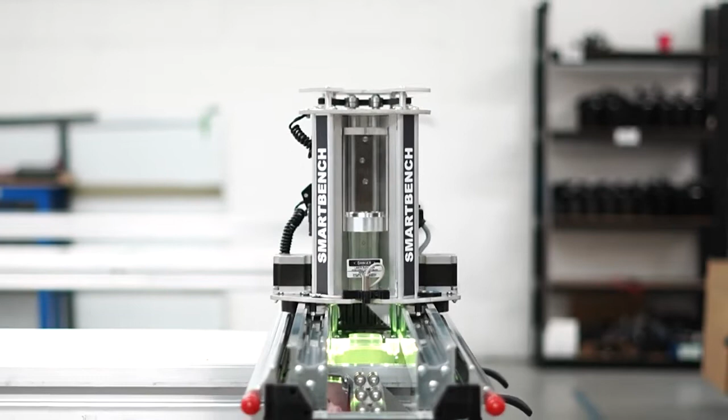Let me show you around.

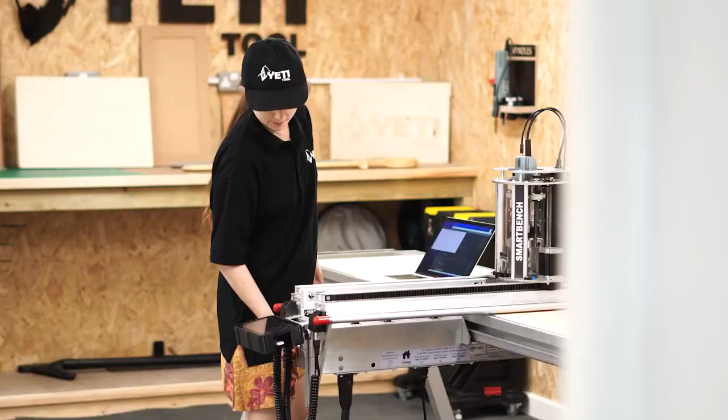We put everything into a large unit in Portishead near Bristol, where we can focus together, from design to software and mechanical development, all the way through to our production line, which can make up to 35 machines a week.

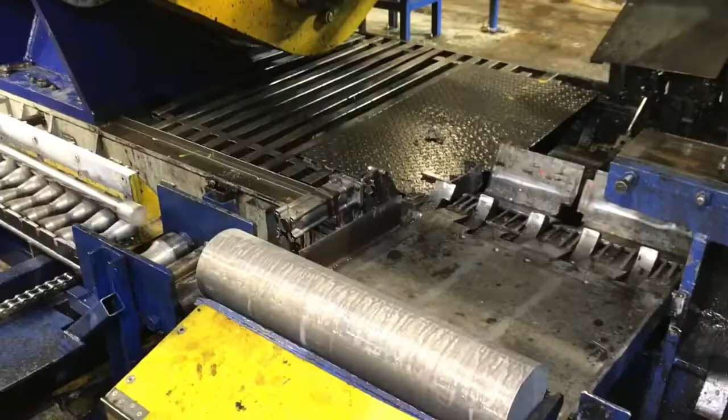87% of all parts that come in to make SmartBench are sourced from local suppliers, which we are really proud of. For example, we design all of our own extrusions for SmartBench, which are pressed up in Corby, processed using sustainably sourced aluminium from the UK, and then delivered in pallets down the M5.

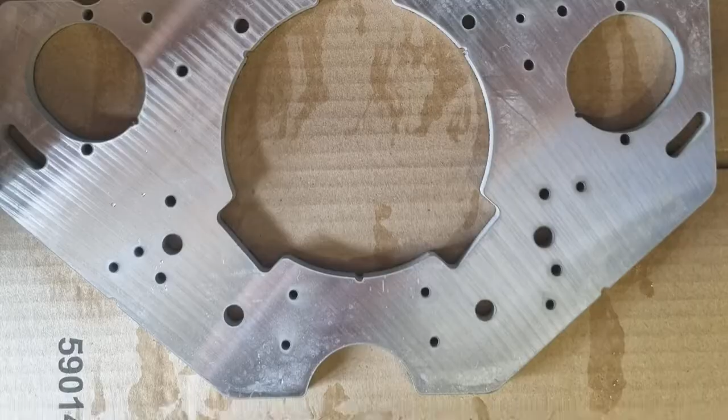And our alloy plates, again specified by our engineers, are waterjet cut down in Plymouth and then modified in-house to meet precision specifications. Other parts, like the racks in the X and Y axes, are actually manufactured right here using our own SmartBenches.

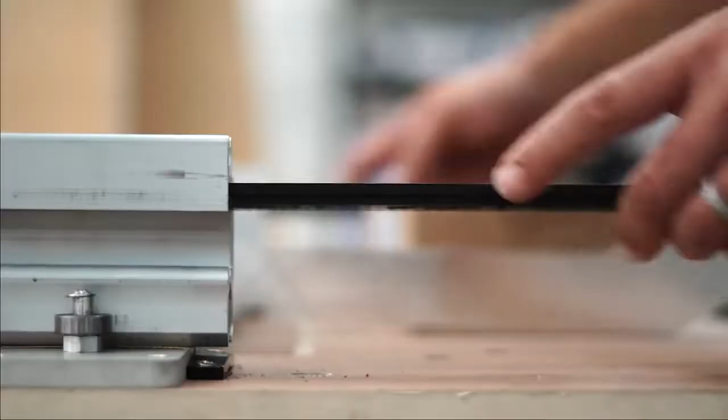I mean, that's what CNC machines are good for after all, and we're not short of that technology. They power through 12-hour shifts and are placed in an environmentally controlled chamber, which we need for this particular material.

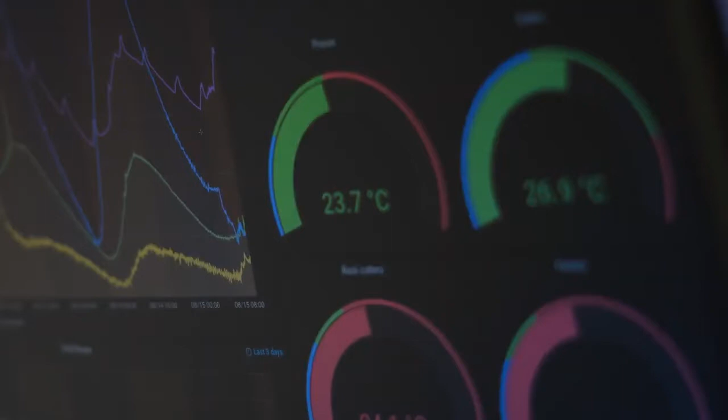When the stock comes in, it's worth £150, and when it leaves, it's worth £2,500.

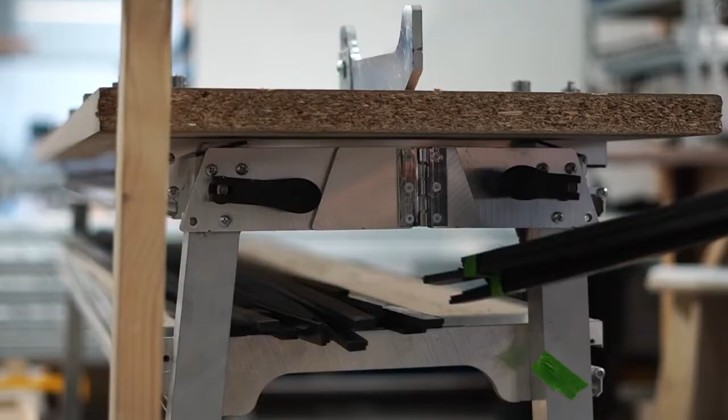Once all these parts have passed their own quality checks, they're distributed to the sub-assembly stations where operators are ready to build.

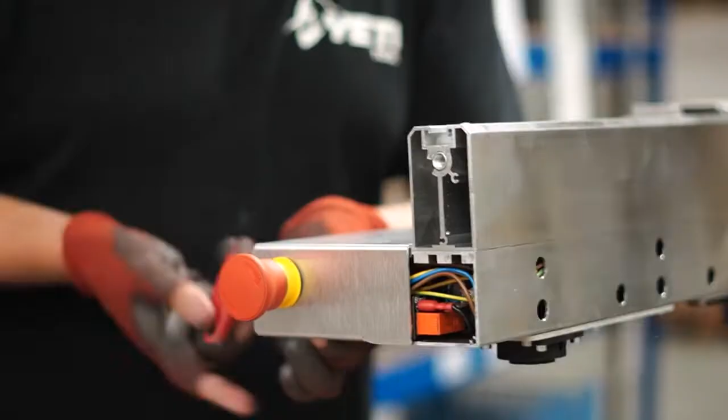SmartBench is made up of 6 different sub-assemblies, and we have an assembly station for each one. As each sub is built, it has its own unique test to check it's performing as expected.

For example, the Z-head, which takes the most time to build. From scratch, this would typically take about half a day to make.

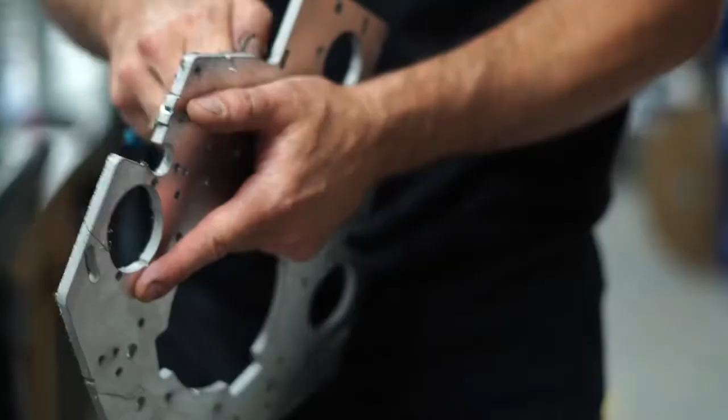When the mechanics have been built, it's connected to a jig which runs the axis up and down to measure the force needed.

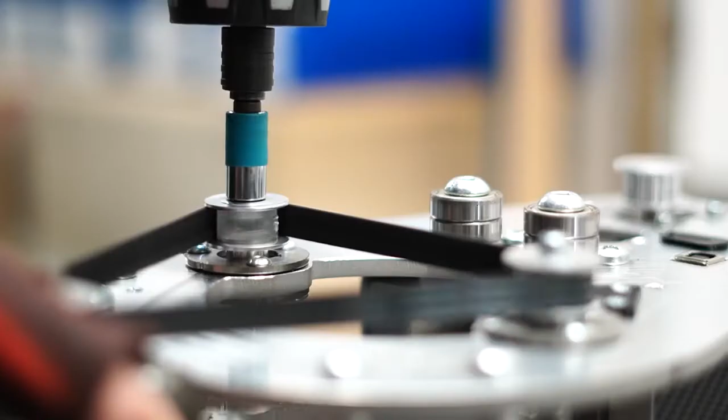We get all of the graphs in real time so that the operator can analyse the rolling resistance.

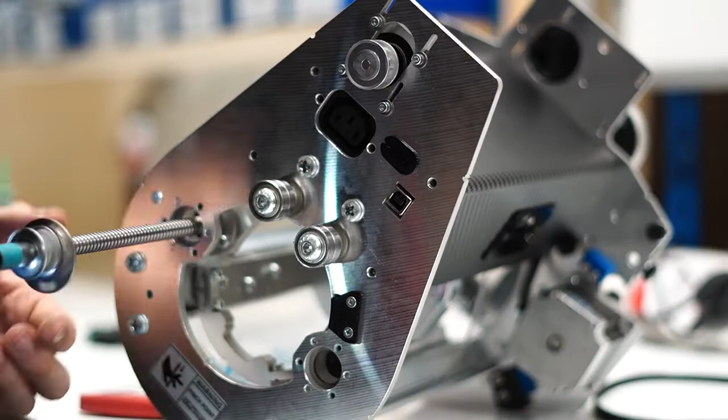Once the mechanics have passed, it gets its own set of electronics, which then does a self-test, finished with a calibration soak procedure, which takes about an hour.

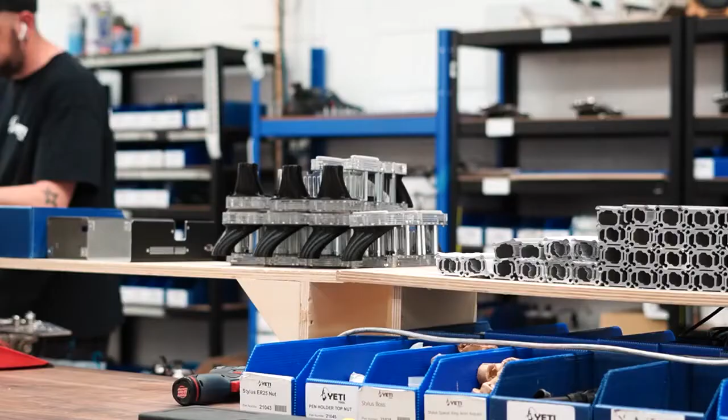We apply this level of testing to all the sub-assemblies that have electronics, so that when the finished sub-assembly gets put on the shelf, it's perfectly ready for final test, where we're able to bring the whole machine together.

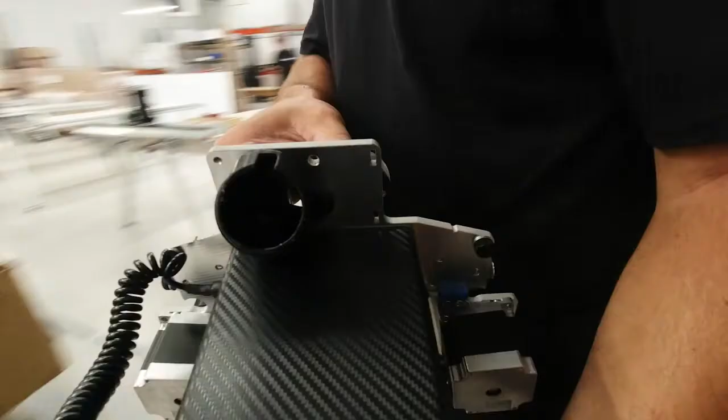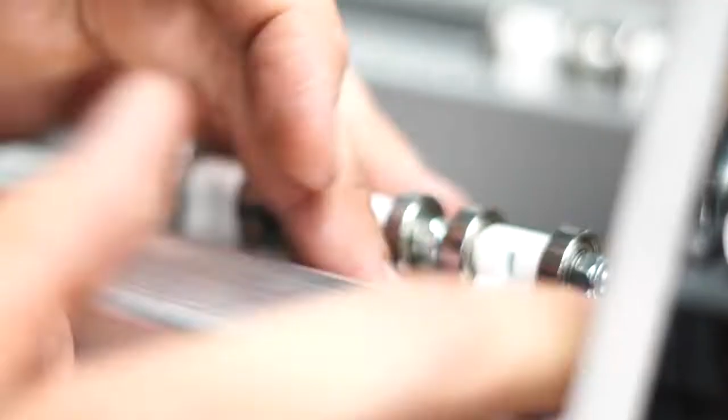We build up the machine just as you'd assemble your own SmartBench. After it's been checked and squared, it's given a serial number and sent on an automated 6-hour endurance test to run in the machine.

And at the same time it records its own performance. All the while it's measuring 1 million data points, which all get sent up to a server for central analysis.

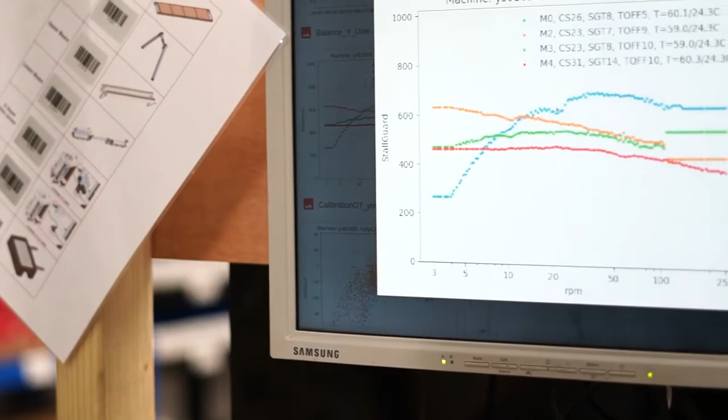Once the bench has passed all of our data checks, it gets a final visual inspection by a separate QC operator before getting cleared for packing.

With a SmartBench coming off the production line every 1.5 hours, monitoring the whole process is a challenge in itself.

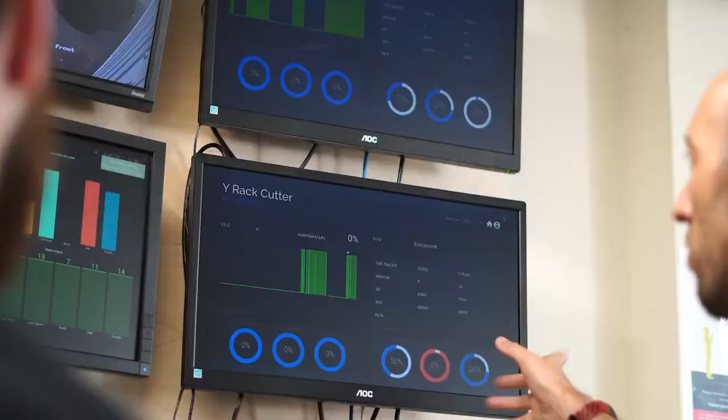We're able to keep an eye on rack manufacturing using SmartBench's own Smart Manager, which informs our engineering team on the progress and helps them to identify any issues, sometimes before the operators are even aware.

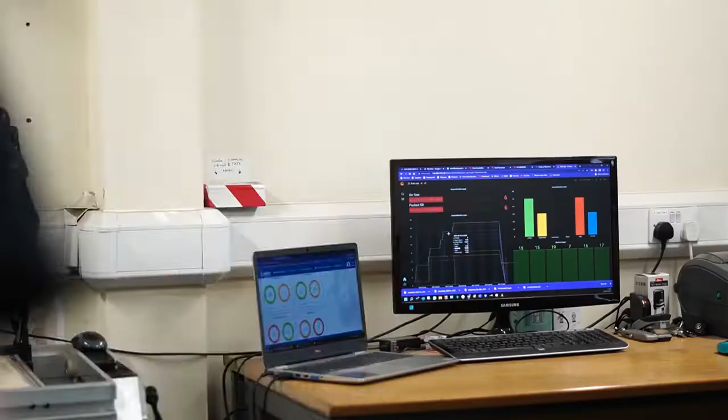As well, we have live dashboards which monitor the production stages throughout the day, updating every 5 minutes so we can quickly see if there are any bottlenecks.

While we're here, we can talk a little bit about the work the engineers do. This department is mostly responsible for control. We stay on top of our specifications for our supply chain and are constantly monitoring our own internal QC processes.

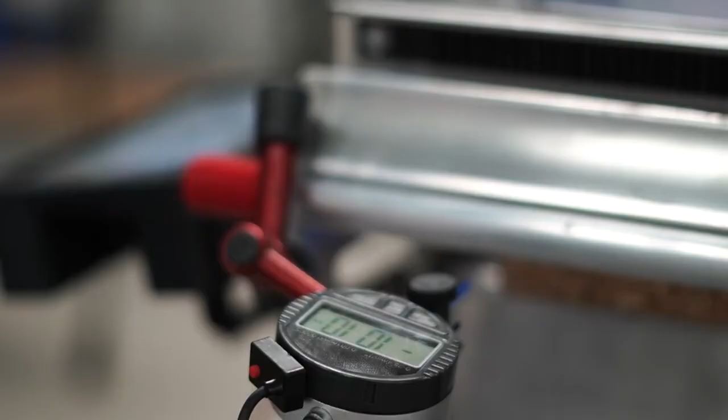And of course there's R&D. This is where we try to make customer requested features a reality, always looking towards SmartBench's future.

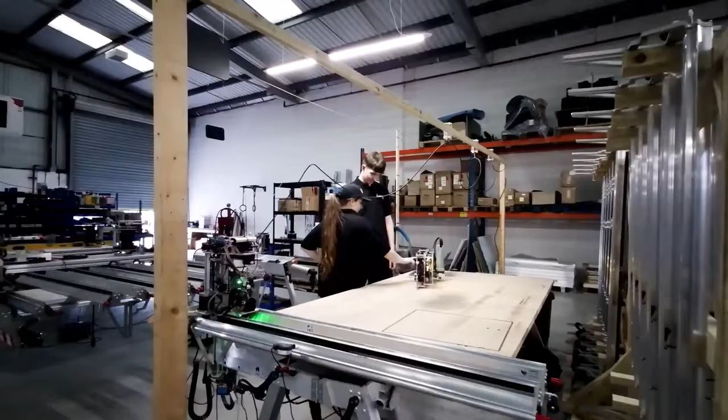And that includes a team of electronics and software engineers who are constantly improving our SmartBench interface, bringing in new features and tools which we publish as free updates.

Upstairs, we have our own marketing suite where we film our how-to videos for the Yeti Tool CNC Academy, and we're able to demonstrate SmartBench.

And just next to that is our customer support team.

Good afternoon, Yeti Tool customer support. Please can I take your ticket number?

These are the guys responding to tickets, chatting to you on the phone, and going above and beyond to get our customers where they need to be.

We live and breathe this technology. It's amazing to work with such a passionate team.

Everybody wants to see the photos of projects from our customers. Everybody's game to muck in with a crazy idea, and everybody wants to keep SmartBench at the top of its game.